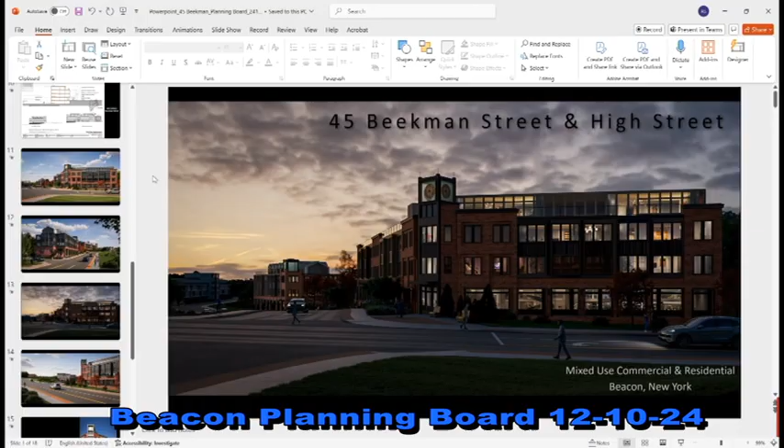I think we had already established zoning compliance, as you all recall. We will ultimately need a variance for a very peculiar setback in relation to where we are. I'm wondering if, when the property is conveyed by the DOT, whether we'll still need it. But in any event, we added some additional parking, so we have three new spaces on the plan to be ultra-conservative from prior analysis.

With that, Rich will also touch on a recent meeting with the DOT. I think the board is aware, but I believe Mr. Russo and Mr. Worsted were both on that call as well, so they can weigh in on that. We are nearing, ever so close, to a final determination by DOT, or hopefully conveyance, of that property.

You know, I've been telling Rich, it's all I want for Christmas is a new right-of-way.

But for now, I'll turn it over to REA just to give you some updates on the actual plan. We'll turn to Justin and Rich.

Good evening. As Taylor mentioned, we had our third meeting with the ARB on Friday, and the renderings you're going to see are what we reviewed at that meeting. I'm going to be updating those based on the comments we talked about on Friday, but we did adjust several details since the previous meeting. The main change was that corner tower.

It was sort of square to the corner before. Now it's chamfered, so you walk directly into it. We lost that column that was sort of interfering with the pedestrian access there. And the way that the tower relates to the corner has changed. We're still kind of working through how that plaza would be integrated with that, but I think the committee was generally in favor of that move and that interconnection with the plaza.

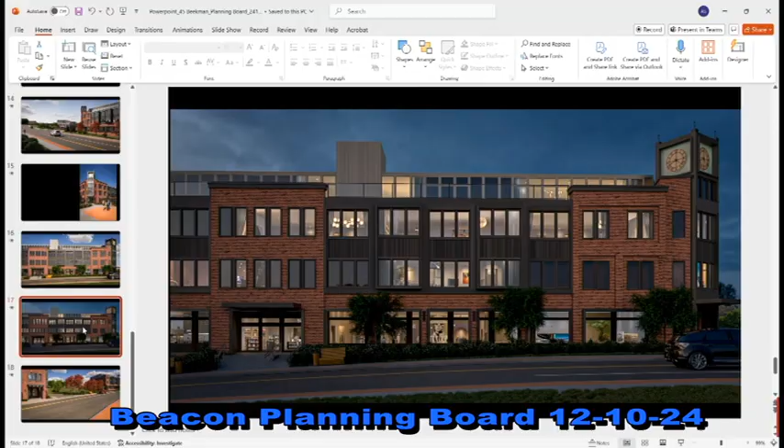Yeah, there's some more images from that. Nighttime view. And then that's just a view of that little area between the buildings as that's getting developed.

But yeah, so there were just details or recommendations on how to reinforce some of the details and integrate it with some of the new work. Sorry, Aria, what view is this? This is down Beekman between the buildings? Yeah. How do you get that rise between the buildings? Is that build-up landscape? Is it the natural topography? I need to confirm a little bit and see if that's actually what's there.

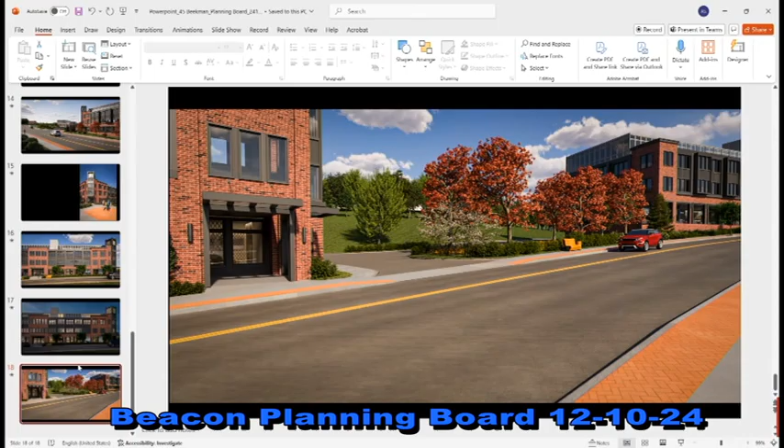Looks like there's a hill there. Yeah. I don't think it's that hilly that close. Okay, it rises as you move back on the site, but I think that's a little too close. Unless you want a hill. In which case it doesn't exist. Yeah, I'll tell you this, I'll settle for a realistic representation of what we're going to ultimately see when built. Yeah, that would be nice. That's what we're working on.

I recall you bringing people to task for notional trees and whatnot, things that ultimately don't get built but look nice in a rendering. Yeah, kids holding balloons is fun.

So basically, once I get the notes and confirm that what I'm thinking is included in those notes, then we're going to go through some of the additional details that we talked about and submit the renderings again. I'm just wondering what the recommendation would be at this stage. Do we do ARB again or start coming back to the board?

Let's hear from ARB members. Yeah, okay, and also the non-subcommittee board members. We're all the architectural review board when we're together, so I want to hear from the subcommittee and then other non-subcommittee board members tonight, and then we'll make a determination on whether another ARB is necessary. So that's my summary. I don't know if you want to do the ARB members. Now let's touch on that, and our subcommittee members are Kevin, Len, and Karen.

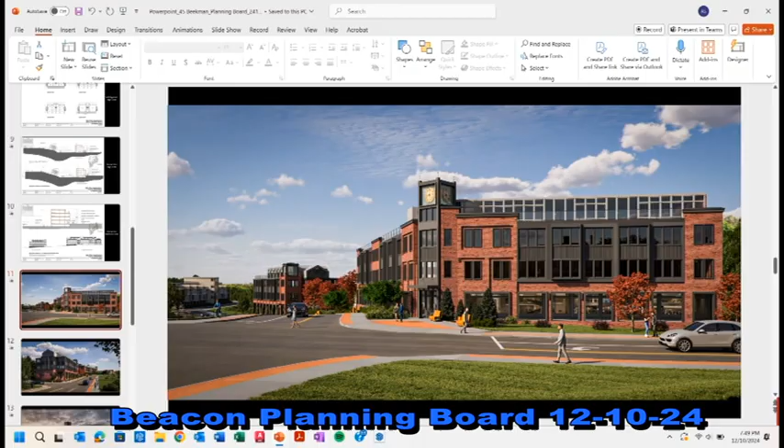We talked about whether it might be better to have a consistent material on the tower. Maybe, I'm speaking for myself here, but maybe it's the metal clad entirely, because it would create a contrast to the tower on the High Street building, which is right now entirely in brick, I think, except for the prism on top of it.

I don't know if you can pull it up while we're chatting, RA.

On the tower on the High Street building, it's got three piers that project up beyond the third floor. Compared to the clock tower, which is kind of slender, the tower on the High Street building seems a little blocky, and the piers looked a little bit tall and maybe not as graceful as they could be.

So we talked about reducing the height, maybe looking at some different materials. And then there's almost a third tower on the southwest corner of the building we're looking at right now. We had a question of, can there be a variations-on-a-theme kind of approach where each one is a little bit different. The one on the High Street building's got a prism on it, the other one's got the clock face. The third one doesn't have a feature on top of it and doesn't necessarily need to, but maybe between the brickwork there can be a thematic relationship between those elements.

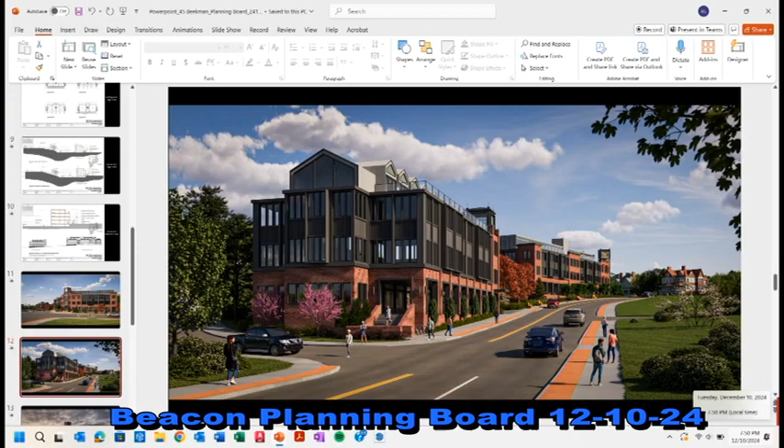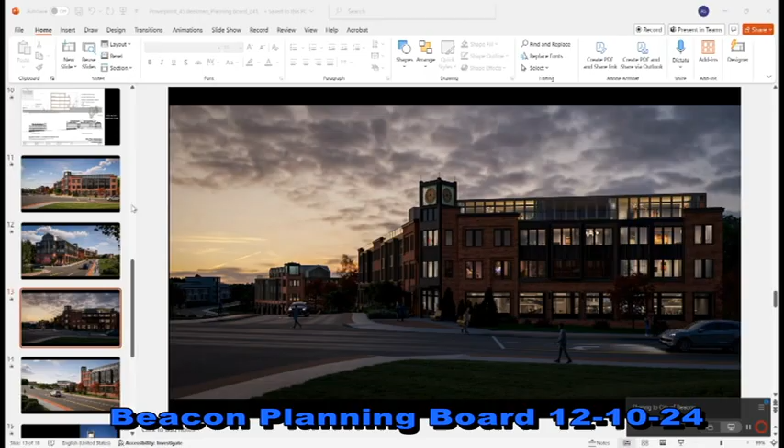And then we were looking at the building on the corner of Beekman and 9D. There was a question about, if we can get the daylight version, about the height of the brick that's between the top of the second floor and the bottom of the third floor windows compared to the height of those metal spandrel panels in the bays that are metal clad between the top of the second and the bottom of the third floor windows.

I was just saying that maybe the spandrel panels are kind of wide, a little bit chunky, and that maybe if the thickness of that band was reduced to the height of the brick band between the windows and those brick bays, it might give a little bit more lightness.

You're not going to be able to see it from here, but the way the renderings were set up, there's a metal casing or molding around the first story rectangular openings that access onto the arcade. In the renderings, it's pretty thick, and it reduces the amount of brick you see in the center of those pillars to almost just one or two bricks wide.

So there was a comment about maybe you want to adjust that. The vertical columns on the arcade have a very thick metal casing or molding around the openings, and the way it was shown in the rendering, it pretty much diminished the visible brick at the center of each column down at the first floor, down to nothing. Can you show a zoomed-in view of the arcade or the corner?

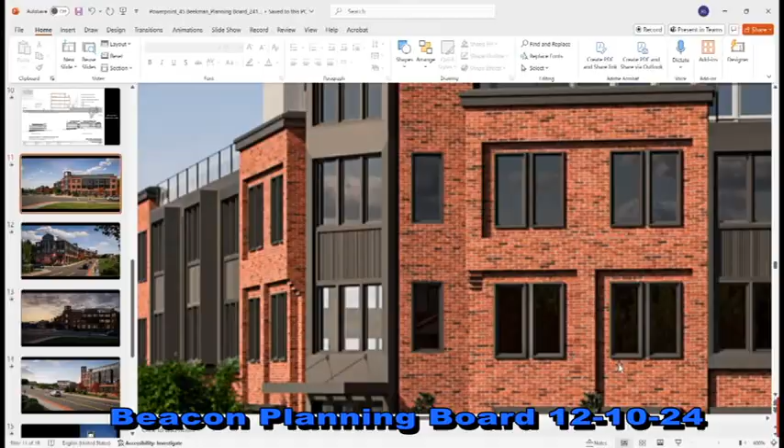Yeah, there was something we saw. It kind of starts, and there's some distorted artifacts in the rendering, a couple of them, which were distracting, right? Yeah, well, I don't know if I can, I see what you mean. Yeah, right, the thinness of the brick on the columns of the arcade. Yeah, we're just talking about the thickness of the metal, thinning that up.

The last thing we were talking about, and this is getting a little nitty-gritty, but on the brick-clad facade to the right of the clock tower, on the very left-hand side of it, on the vertical pilaster, there's a corbel between the third and second floors. On the other side, there's not - it goes all the way down. So I was just saying, you're going to have a different plane of brick on either side of that arcade opening if one side is corbelled and the other side isn't.

Which I don't know if that's kind of weirdly distracting, that there's some detail that shows up somewhere and not all down the brick. So we talked about it - Karen, you were saying that it would be nice to fix some of that stuff.

And I think in the rendering too, there's a little bit of an MC Escher thing going on the left side of the clock tower that's just a rendering artifact. But Karen, I think you pointed out that it would be nice to get maybe a little more brick detail on the south-facing, the Beekman-facing side of the building, on the brick elements, to match the detail we're seeing on the 9D-facing side.

Yeah, they looked, at least in the rendering, pretty one-faced and without... So we were talking about getting some layer shadow layering lines. Yeah, I am in agreement.

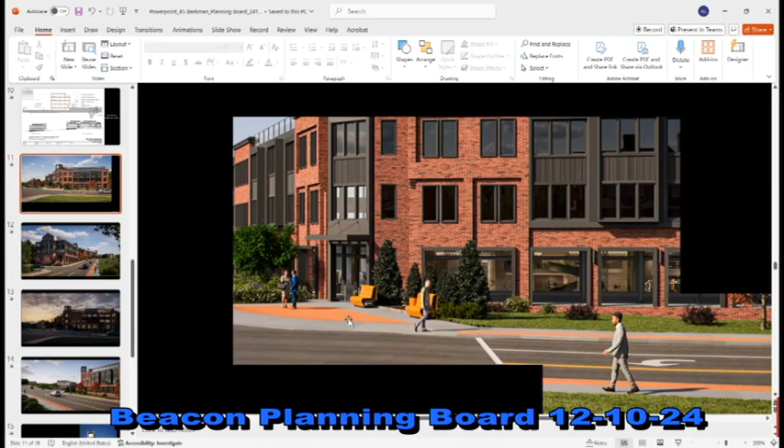I think it would give more of a sense of strength, for that reason, maybe those piers should read more heavy. I'd have to agree, because I feel like the framing, the black, it looks like storefront, like 6x6 storefront. It feels a little unsophisticated. I feel awkward about it. I think it's a scale thing.

First, I was looking at articulating it with a little bit more levels of stuff, but that was getting a little too much. What I was trying to do is just get some proportion that looked like it was actually supporting, as opposed to an arch. That frame is sort of supporting, but I don't think it's quite there.

Technically, it's called a flat arch. But the way I read that heavy metal element is that it has this brick base being supported by columns, and the columns are disappearing, because they're being encroached upon by the frame, but also because you've got that brick infill at the bottom. It would feel a little more strong if somehow the pier element was more articulated.

Remember the windows from the rug building? I forget the name of the project - Warp and Weft. You told me to refer to other buildings in Beacon, so I referred to my own. Self-referential.

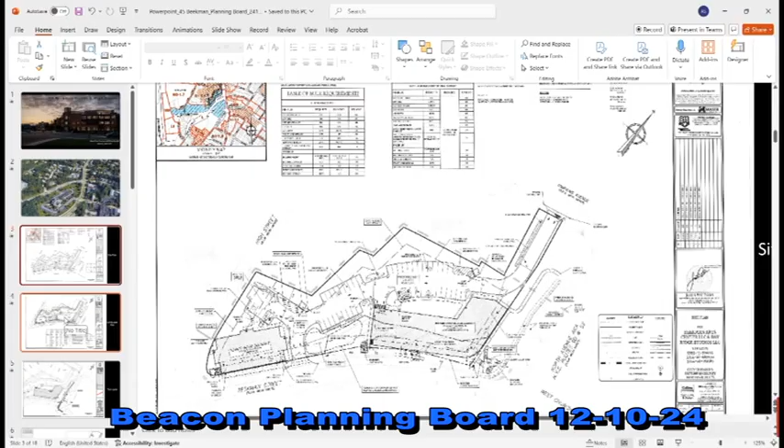Another piece of that was there was a question about whether or not a restaurant or eatery type place could be in the commercial spaces down here. We have talked about that with the applicant, and we've indicated that that's not proposed here. We're not planning any of the things that would be needed for a restaurant, so that wouldn't be something that would be possible. That could, if that was planned, change the parking demands from a typical retail or commercial use.

So I get it. You're not necessarily creating a development that had infrastructure that would immediately facilitate and support an eating establishment, but that doesn't necessarily mean that someone with a great proposal and willing to pay rent couldn't come and otherwise create a restaurant here.

Yeah, I mean, the applicant's position was they haven't had success or good history with restaurant-type uses in their facilities, so they don't really want one here. Could we put that as a condition, if that's what the board wants? Well, when you say stuff like that, I get it. This particular owner is not necessarily building something that could facilitate or support an eating establishment. My point would be, they could sell the building, or they could be offered some really nice rent by an eating establishment and change their mind.

Right, and we've done this in previous applications where if it's a use that has to be before, the building inspector considers the parking calculation based on the site plan. So if there were proposed to go another story, or any other additions or changes including tenancy, they're looking at the parking. We're not proposing that in connection with this use, and it would have to come back before the board. To the extent that the parking doesn't meet demand, because the parking could change, the regulations could change, the building inspector would probably deny a permit and require us to appear before the zoning board—not necessarily the planning board, but the zoning board, explicit to the parking.

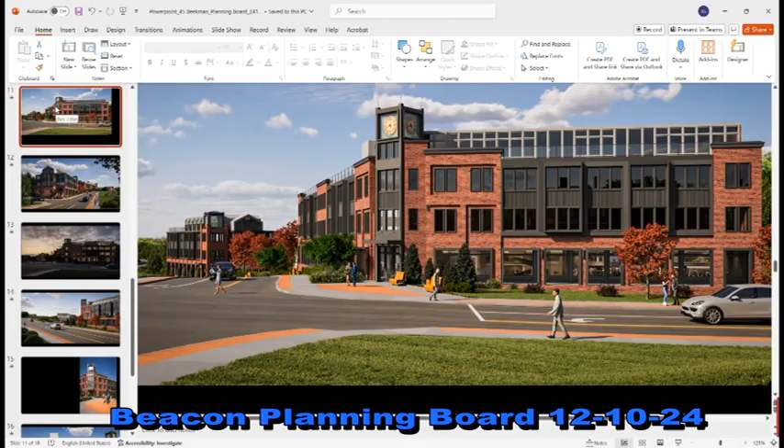Can I make a recommendation for this? It seems like you're placing a number of elements required on the site and then putting things around it to decorate. I hope that doesn't seem too unkind, but what you should be doing is thinking of it as a place. Develop unifying elements. So if you have a grade change, one way to deal with that is to have...

Let's say a semicircular, octagonal, or some sort of wall or feature that ties those different stairs together, that creates two different levels. Then the stairs are just a transition in that area, with a planter in between. I'm just throwing that idea out there. That way you can have something visually cohesive, with one design element, a theme that ties it together.

Maybe it ties into the building, and the various themes already in this building. Then you integrate the ramp, or make the ramp work with that. The way this is sort of set up now, it's a series of solutions to grade change problems, as if this was the back of a warehouse area that just needed access to the dumpsters. It's really just not thought through at all, and it deserves better, it's going to be one of the most potentially valuable parts of the building.

Driving pedestrian use, driving people wanting to go there, making it a human space. If you just do these things that are like entrances, symbols of a door, and you don't have actual people using them, you sort of don't take full advantage of your opportunities.

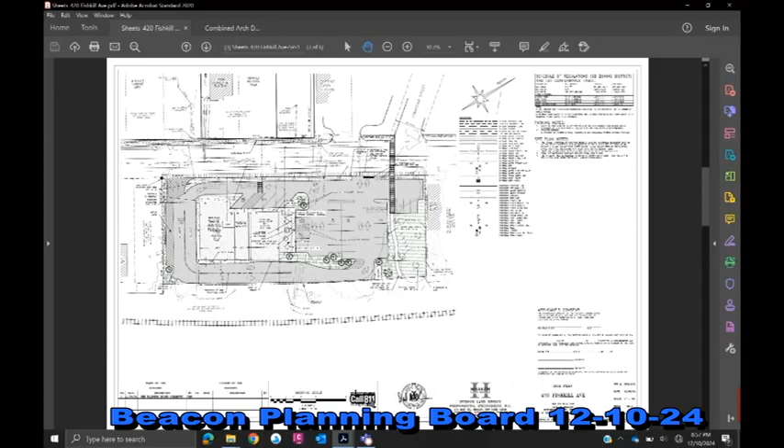So with that, I am going to turn it over to Mr. Raffaelli. Oh, sorry — just so I'm clear on what you're talking about in terms of this sidewalk bank, is that the proposed 5-foot area for pedestrian use?

Yes, you may recall we were all the way up on the street, sort of utilizing even some of the pedestrian or the city's right-of-way in our initial proposal. There were comments and feedback to not do that. So ultimately, we sort of walked, pun intended, that back to bring it into the site. We're suggesting, similar to a land bank parking area — saying we don't necessarily need this parking area, but if in the future someone says we do, we have to build it at our cost.

We're suggesting here that, A, we don't know what the FAC's recommendations may ultimately be, which may change over the next 6 months to a year or never be implemented. So we're proposing to walk back — maybe I'm misunderstanding your question. You want to know what we're proposing?

Can we zoom in a little bit? Yeah — I think you got it. I needed to clarify this, so there's that zone.

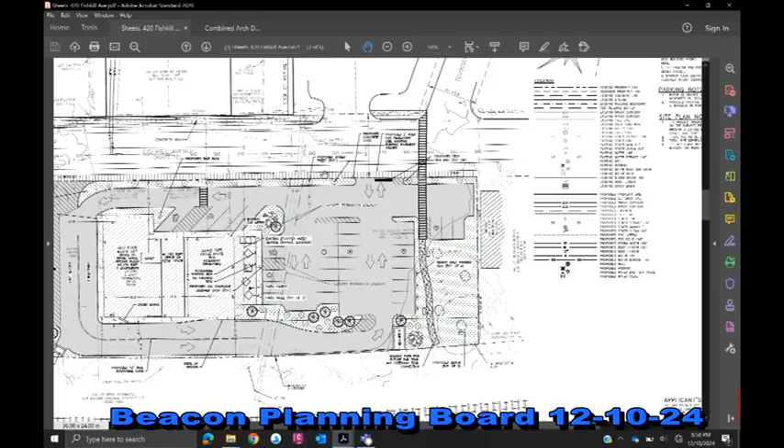We still have the sidewalk area we're proposing internal to the site, but what we're suggesting is that, if the board sees fit, we wouldn't necessarily construct it — we'd leave it as just an area marked out where it could be fully constructed at a later date once the FAC has recommendations.

So that's where I'm a little confused — you just said internal to the site, but that zone I'm referring to is outside your lot line. I'll have Mike speak to the actual area, but the concept is what we're really considering. We're showing an improvement, but to the extent the city finds otherwise, rather than installing a sidewalk that gets ripped up, similar to what's going on the other side of the street, we'd hold it back until those recommendations are ready, then install ultimately what's there. We're creating an area that could account or allow for city recommendations as it proceeds.

So instead of Chris, I'll go to Mike. Thanks, Taylor. Okay, just to clarify this area — here's our property line here. This hatched area that almost looks like rectangular pavers is a 5-foot wide swath. That could be a sidewalk, could be something else. And then you're left with about another 7 feet or so of area outside that white line, or the travel lane.

So you have roughly 13 feet out between the white line and our property line to provide the pedestrian experience with what the committee comes up with. Understood. Right, your proposed concrete curb landscaping goes right up to the property line. Correct, which could be adjusted if there's certain design elements that may intrude into there.

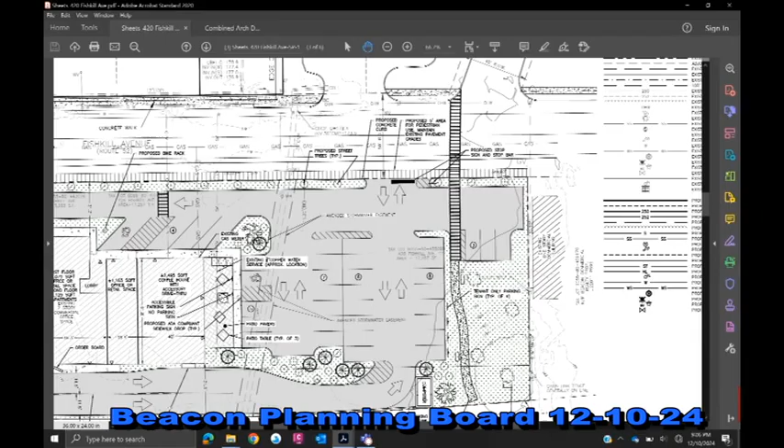Okay, so just to piggyback on Taylor's description of the key changes that have happened to this site, he mentioned the crosswalk across Fishkill Avenue, the connection trail, which is in concept to the future rail trail, and the patio on the north side of the building, which shifted the parking northward. That resulted in some lost spaces on this side, some lost spaces in this little pod here. We gained a space in this pod because that area got longer. And then if I move to the south end of the site,

we've restricted this entrance to deliveries only and removed four parallel spaces along this corridor here for a loading zone. And to delineate between the drive-through and the escape lane, we previously had these candlestick pylons, or bollards, if you will. We are now proposing a mountable curb to deter people from cutting in on that drive-through lane and getting in trouble.

I believe that covers all the layout changes, at least the key changes that have occurred on this site. And we understand there's a lot of engineering to do, the landscaping, lighting, and so forth, but we just wanted to get a general idea from the board as to the acceptance of a layout before we work through those details.

I'm super curious, and actually I know Natalie's also addressed this in her letter, but as far as parking for the apartments, where are those intended? Oh, thank you. So all the way on the other side, designated spaces? Over here for the residents. Oh, four tenant-only parking sign. Oh, that note that says tenant-only parking sign, so there's four spaces with that. Thank you, I hadn't scrolled. Got it. All the way on that side of the parking lot.

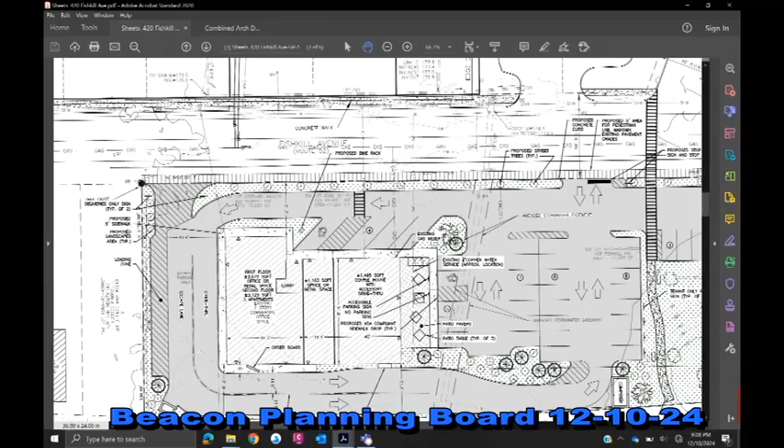So those tenants have to walk across a parking lot, across the drive-through travel lane, to get... Yeah, I think that was one of my comments, just looking at it, right now we're showing a little bit of a crossing between the ADA space, kind of going to where there was maybe something left over from before, so we're showing some kind of way for you to get out of the ADA loading space and get to the crosswalk.

I was just thinking we could discuss, again thinking about the pedestrian experience here, you're gonna have those residents parking in that bank, which I get that it's a little less turnover, so that's why it's maybe kind of pushed off to the side there. But let's think about how they're gonna safely get across the drive-through exit lane, and how folks are gonna get to that plaza and space like that.

Maybe there's space for some kind of landscape island, refuge, or crossing there, so there's a clear indication to drivers of where they should expect folks to be walking through those parking lanes. And that connection laterally across this site ties a few of these things together - the outdoor plaza, the resident parking, and the public space and crosswalk that could lead to the rail trail. So that connection could be helpful.

Sure, we'll look into that and come up with something. Okay, anything else?

I think my other comment, keeping with the pedestrian theme, I do appreciate the crossing across Fishkill Avenue, Route 52. It is a mid-block crossing, so I'm interested to hear from a traffic perspective what we've experienced down at the Mill Street crossing, which is also a mid-block crossing with that dummy light - folks don't actually stop there, don't necessarily yield to the pedestrian. So my request was to look at that to see what else could be done with high visibility - maybe flashing lights, maybe different materials for the crossing, or raised, whatever it is, to try and make sure folks would actually yield there if there was a pedestrian crossing. We're just not seeing that further down the corridor.

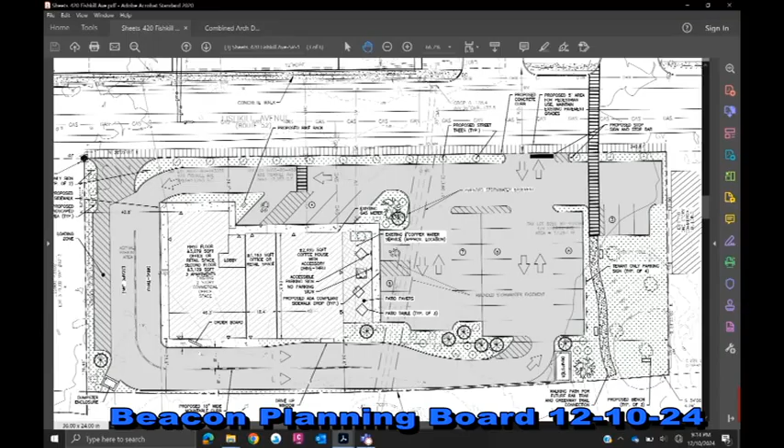And then I think the only other thing is really on the traffic analysis. It's been reviewed by Creighton Manning. We had an initial study, did some revisions, and it was reviewed again. I think at this point everything's been addressed as far as their comments, but in general we took a look at Townsend Street and Conklin Street.

We took into account the other 4 projects I'm aware of along the corridor: 25 Townsend, 397 Fishkill, 410 Fishkill which is Carvana, and the Beacon lofts and storage. In general, all the intersections are going to operate at a level of service D or better, which is pretty typical for the unsignalized intersections along this corridor.

Our analysis was somewhat conservative because we looked at the total traffic generation, but in reality a lot of the traffic for the Dunkin' specifically is going to be attracted from the existing traffic already coming along the corridor.

So you're driving to work on a normal trip, passing this site. You don't stop at Dunkin' today, but Dunkin' goes in and you may stop there. You're not a new trip to the roadway system, so you're not new to the intersections.

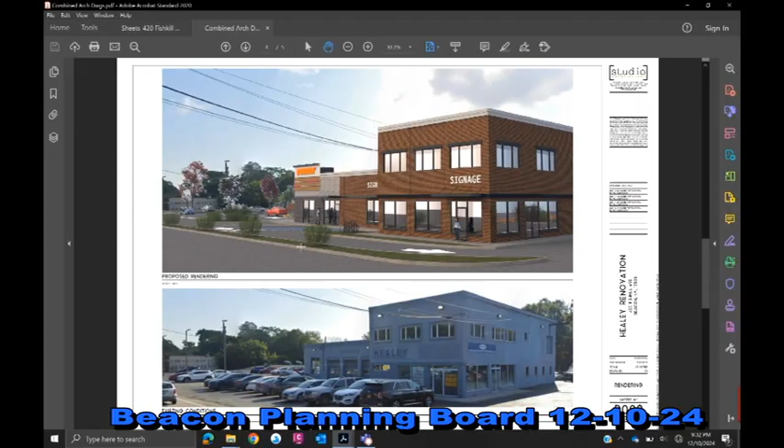The brick does, can you flip over to the next one? Yeah, so this is the residential and retail corner of the building. These are slightly developed from what was actually submitted. We're continuing to work on this, not quite finished yet, but based on the guidance we received last meeting, this is kind of where we ended up. Is there one more? Here is the view looking south at the side entrance to Dunkin', with the pickup window on the left there.

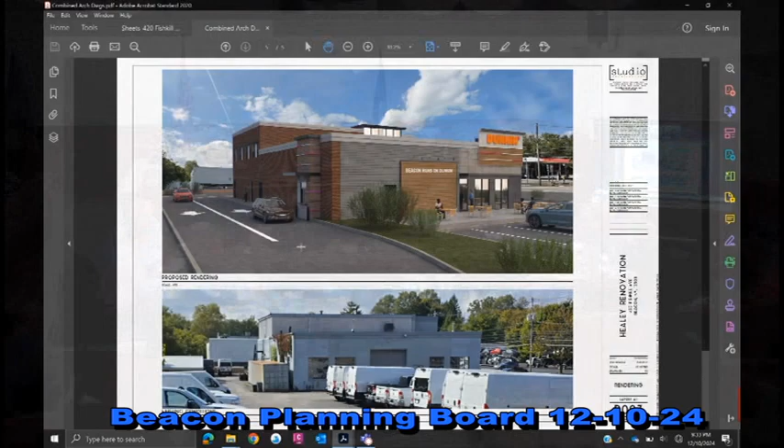Anybody else want to start? I'm curious about the material you're proposing for what looks to be a sort of cornice. Is that intended to be new at the high point of both buildings? Yes, it is. And what specifically is the profile there, and the depth, do you know? From the brick face, the first pane is 3 or 4 inches, and then another 3 or 4 inches on top of that.

So it's flat boards? Yeah, flat board, right. And what is the total height, do you know? I do not. The only change in the building height is at that stair tower. No, the overall height of the cornice. No, I don't. Okay, 18 inches or so? Could we get a little bit more specific next time?

Sure. Also, I'm curious, do you see how the cornice element here, which is the same as the one here, makes its way around the front and around the entire building? Is there any way you would consider articulating it differently, in this sort of language as opposed to this language?

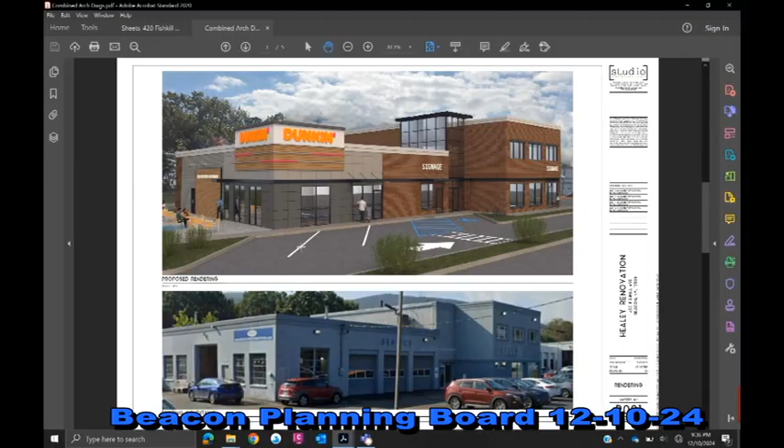But anyway, also, are you intending to make that, whatever that upper surface is, as it's making its way along the other side, is that intended to be glass as well? This piece comes up above that roof line, is it intended to be glass along the backside? Yes, it is.

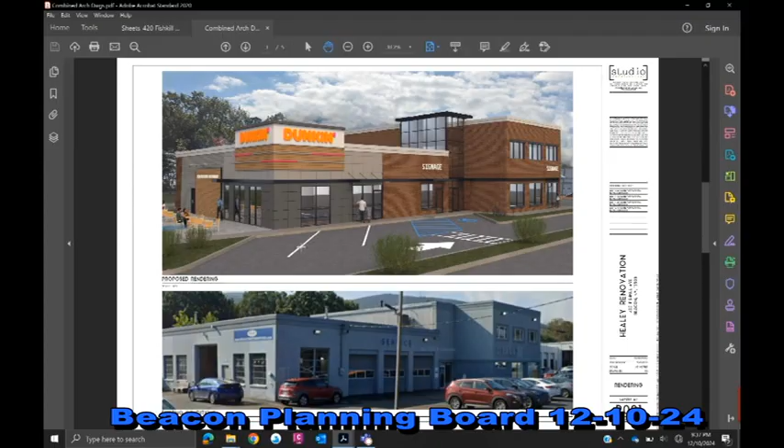So what you're looking at on your tablet is as submitted, and on that rendering we've lowered the overall height a bit. Yeah, if you're showing something new, we need to see it here, because we can only respond to what we're seeing here. Is this brand new? Couple days old, yeah. Oh, well, when are you going to submit that? In 2 weeks, but it will reflect further comments from you tonight, so it's an evolution. All right, so again, I'm focused on what was submitted, I can't respond to that.

The other question I have is, you actually make a good case for why this might not be great. As this sign comes up and it's really thin, it actually allows you to capture a view of the other side of the sign. Does it? Not ideal, yep. Somehow you need to resolve that.

And then I'm just curious, these expansion joints, is that what they are? In the brick, is that an expansion joint? Is that what these are? It's just a reveal, yeah, we're trying to change the plane a bit, haven't resolved it totally yet.

Okay, so a little more understanding of what that definition is meant to be would be helpful. Yeah, it's sort of, it jumps around on the different views. So if that is a design element, it'd be good to know ultimately what that's going to end up looking like and where they're actually going to end up landing.

I think obviously a lot of the perception of this building is going to be done in context of the landscaping. The landscape, especially any proposed landscaping up in this zone, is going to really start to soften things here. So I would really like to see what the whole composition is intended to be and what it will look like at some level of maturity.

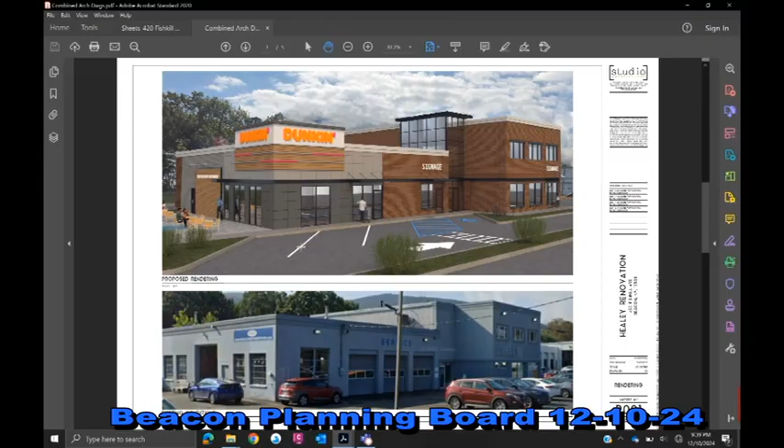Any other comments, board? And a question about the material, the panels on the Dunkin' Donuts portion, is that like a Trespa panel? Are those metal panels? What are those? The gray is a different gray, stone. It's a stone? Yep. Is it cast? Yeah, cast panels.

And then, so upper and lower? Yep. Light and dark? I think overall the brick is very flat and needs some detailing.

Yeah, I agree. And the Dunkin' Donuts portion, right? I don't want to get into this right now, but it's really awkward the way that all the planes are the same, but there's just a change in materials and the sign that pops up. So if you, and then the awning line goes continuously through, connecting them, as does the cornice, right?

So there's two ways I think you could do this that would make sense if it was me. You'd either make that a distinct composition on the corner, because the signage is different, the brick, and have it stand out as this small little coffee location, right? Certainly. So that it appears smaller, and the rest of the building is brick. So that might contribute to the story you're telling.

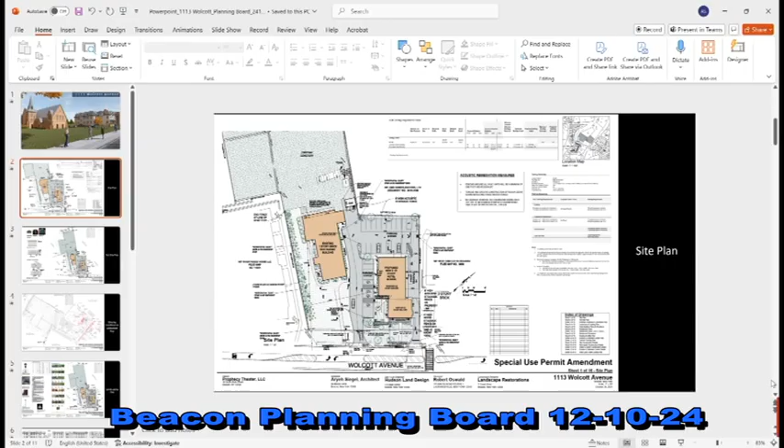So basically the main change is that the use would change to restaurant from event. And the applicant has approached some of the neighbors about this and generally feels there was more support for the restaurant, so far with the ones they've talked to.

Rich from Colliers did an updated traffic and parking study, based on the restaurant use. He can talk about that a little bit, but essentially it's just that change of use.

Okay, that's it. You want to hear from Rich and then do the comments, or? Sure, well let's do that. Yeah.

Okay, so with the change to the restaurant use, we took another look at both traffic and parking. On the traffic end of things, if you recall, we previously had analyzed this for initially a 350-person event, and obviously that got reduced several times. We were down to, I think, 150 people was the max at the end of the day.